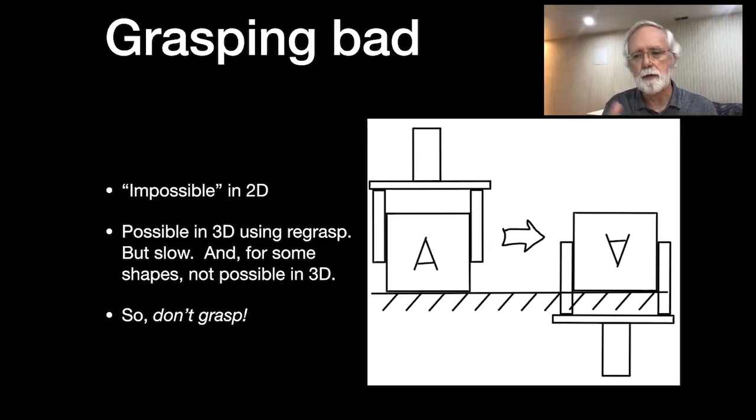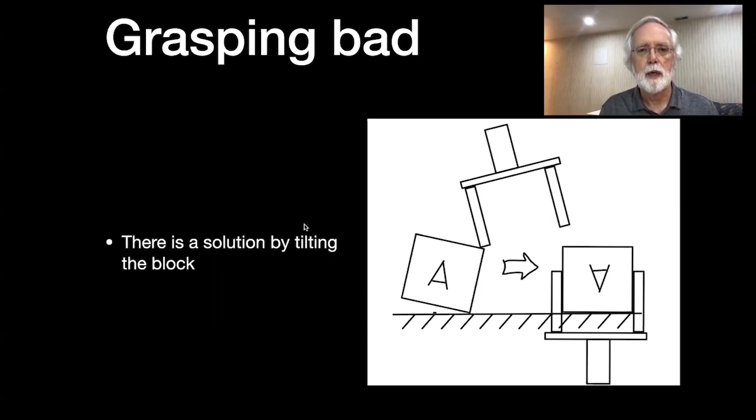And so now it's not always a good idea. And here's an example where it's not a good idea. If you want to invert that block, the hand's going to intersect the table. So in that case, you don't want to grasp. There are other options. Okay, well, why not push down on this corner and rotate it? Or maybe push on that corner, or maybe some of each, and you can rotate it over into this position. So that's an example where grasping is not good.

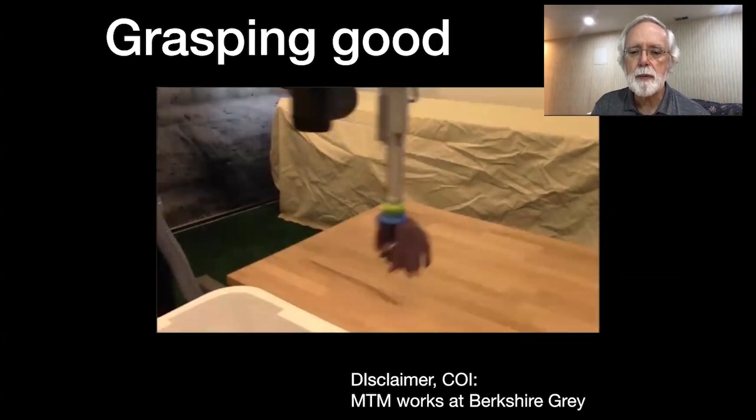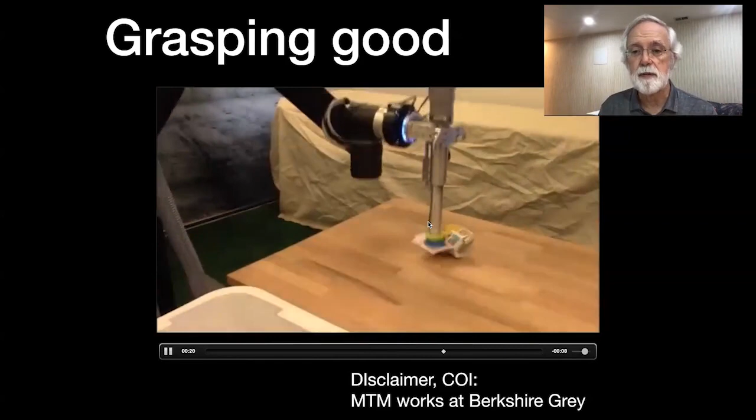Here's an example where it is good. And I have to tell you, I have a conflict of interest here. This was done by Berkshire Grey, where I work. But you can see it seems to be very straightforward, and it's certainly very fast and very effective, and lots and lots of different things it can do. It's not as straightforward as it looks. There's actually a lot going on behind that you can't really see.

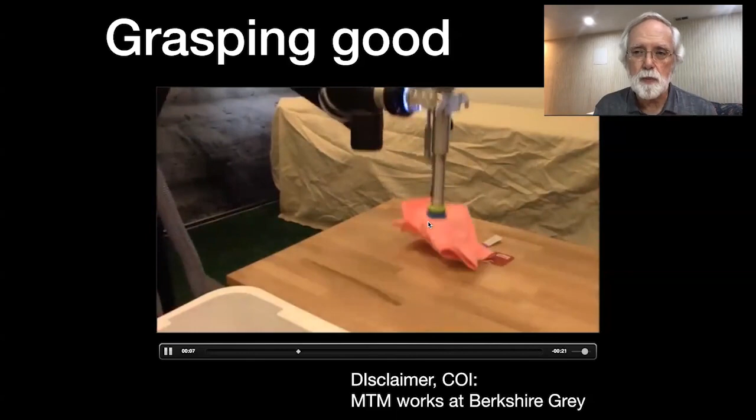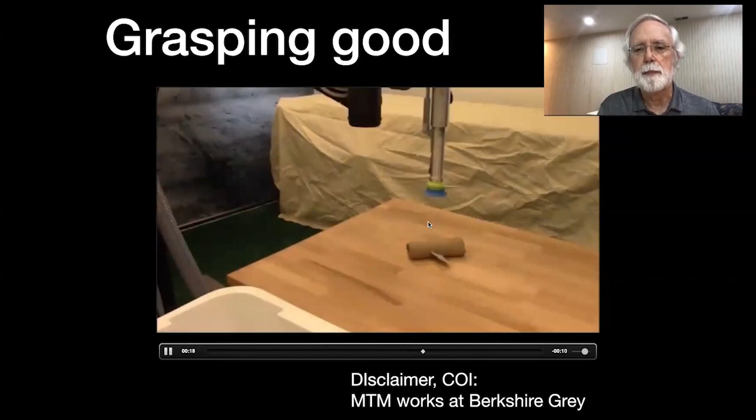But what's the value of this? Why do we want to grasp things? Well, in e-commerce, order fulfillment or warehouse or parcel sorting, there's lots of cases where actually just being able to pick something up turns out to be very valuable. Like if you're just moving things from one bin to another, picking up is a big part of the problem.

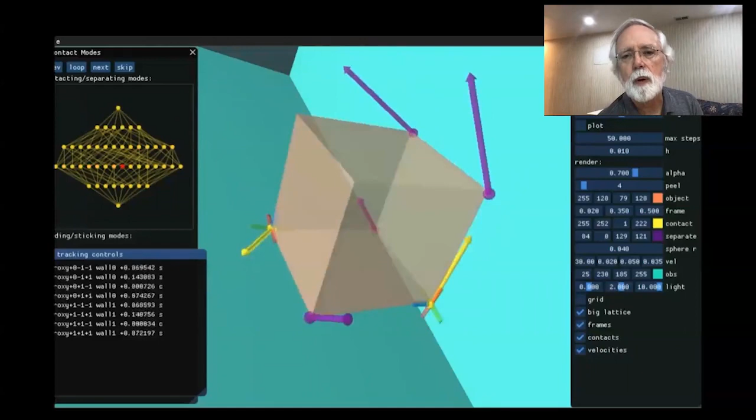Now, one thing then, if we're going to work with contact modes, is we might want to be able to enumerate them efficiently. And this is some work done in my lab; it was led by Eric Huang, and Xianyi Cheng also helped with it. So what you're looking at is that those purple vectors are velocity vectors. The yellow ones are for points that are in contact.

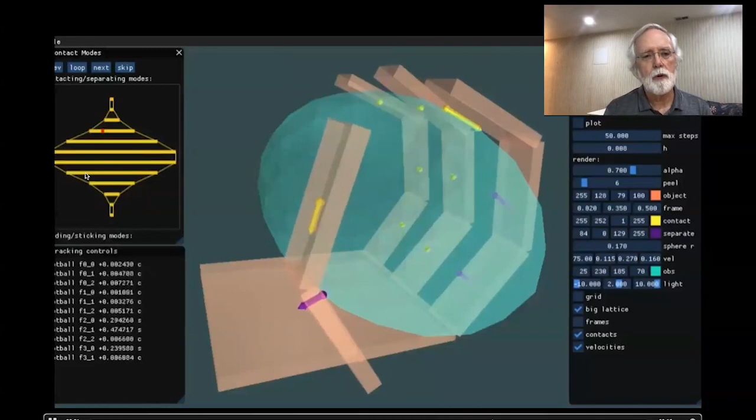And all the contact modes form a lattice. So up here in the upper left, you see a lattice, and it was systematically walking through every contact mode, showing you the corresponding motion. Now here we have a much more complicated situation, and the number of contact modes is much greater. So great that the individual modes that are represented by yellow dots have all merged into one big line in the lattice here. So with that many contact modes, it certainly matters that you can enumerate them efficiently.

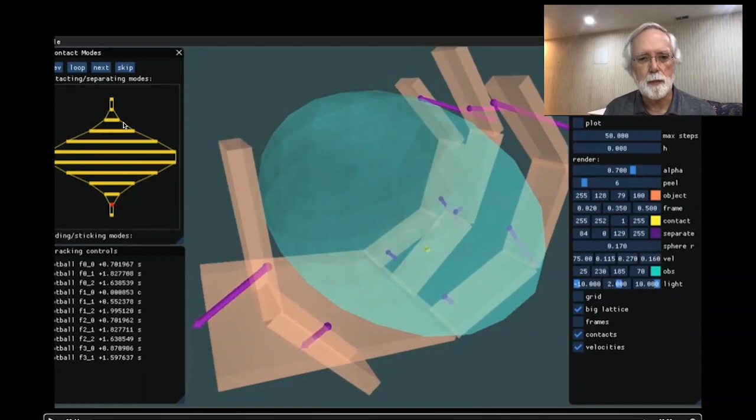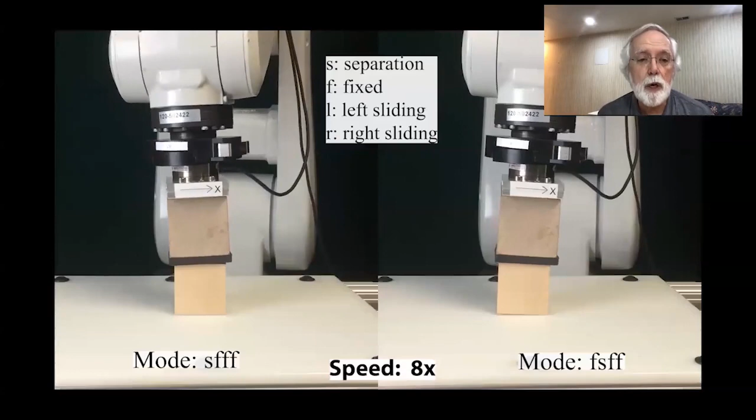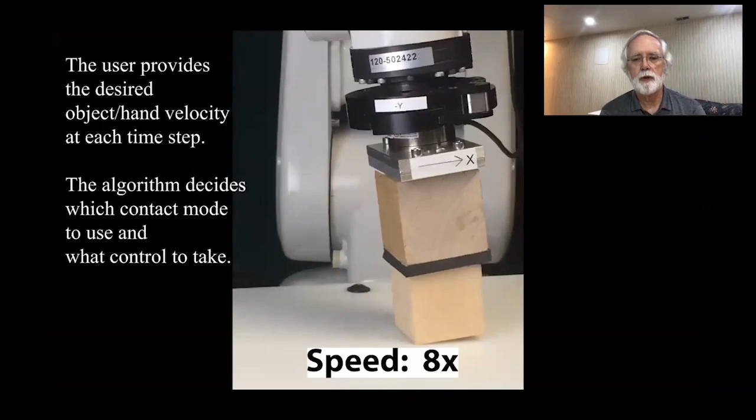So maybe that helps. I promised to show you a little bit of the work that's going on in the manipulation lab. This is to explore, can we control contact modes? And this thing is just showing off. It's just going through all the different contact modes that it can. And then here it's using control of contact modes to put a block up on a corner.

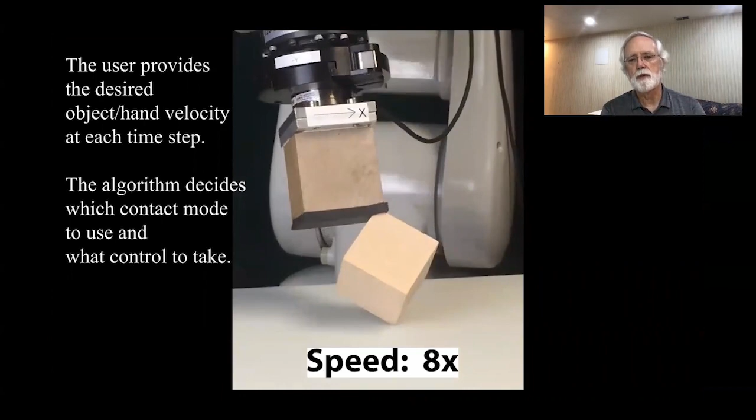Now, the way this works is that it's wrapping a force control loop around the velocity control that we get with the industrial robot. And there's about 1/10 of a second latency, so it's not as fast as we might like. Still, I think it's pretty impressive. This was work by Yifan Hou in the manipulation lab. And depending on the contact mode and the phase of the moon and so forth, it works or it doesn't work.

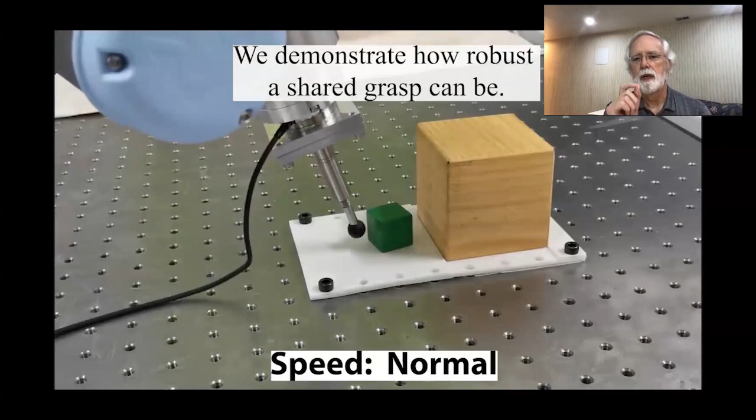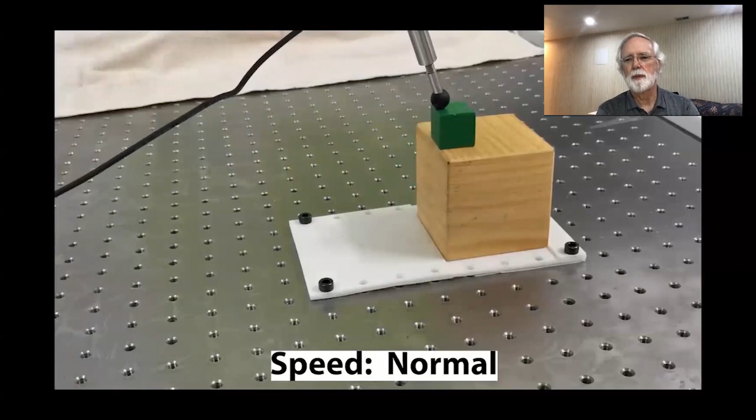And a significant part of this project is to identify contact modes that are more robust, because a lot of them are extremely fragile, I'll say. So you can see it doing a lot of interesting things. This is somewhat akin to how to put block A on block B, I guess, and rotate it at the same time.

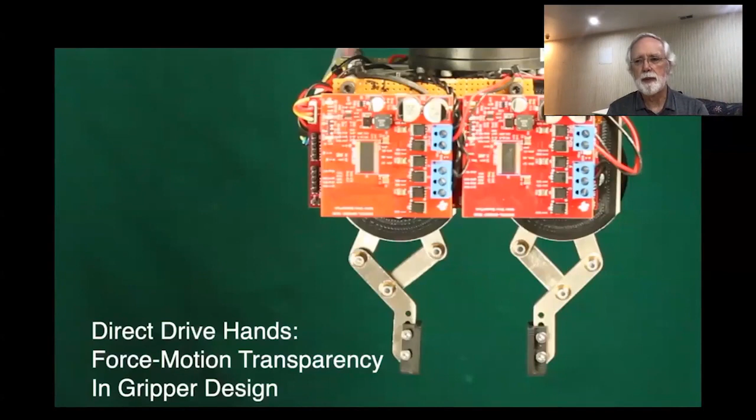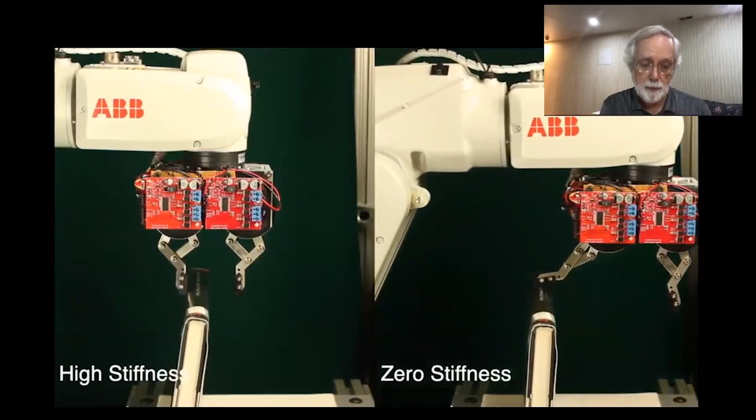I'm going to move ahead and show you one other system that we think will be able to do an even better job. So this is the direct drive hand. This is a project led by Ankit Bhatia and a collaboration with Aaron Johnson at CMU's MechE department. So it's a direct drive hand. There's no transmission. And so what we think this gives us is transparency. And well, first off, it gives us compliance. That book is delicately balanced there, and yet the finger just swings out of the way if you're not deliberately forcing it to behave stiffly.

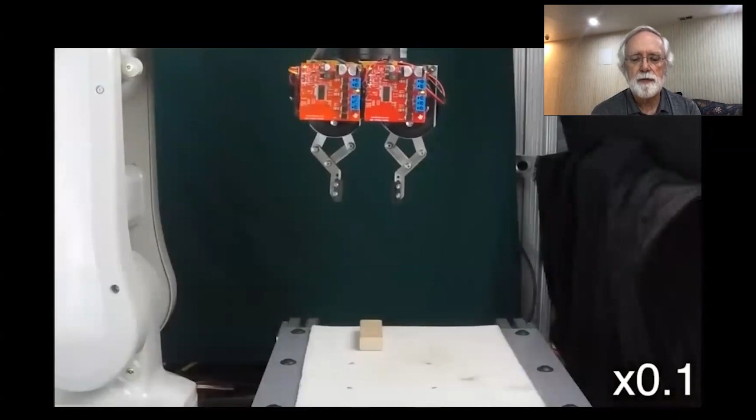It's also very, very quick. And so between the natural compliance and the quickness, and without having that other control loop in the way, we think we're going to have a very responsive, very compliant system that we'll be able to use to control contact modes very efficiently. So that's the direct drive gripper.

Really, I think Daniel Whitney's work on assembly led the way, and a lot of what we've done follows in his footsteps.